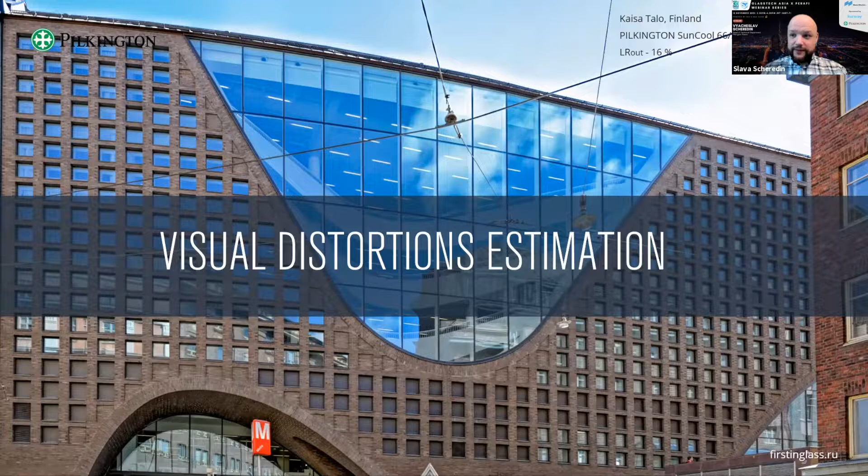But when it comes to reality, and the building is ready-made and done, there are a lot of distortions which you can see in many cases. Of course, most of them because of physics. Physics cannot be avoided, you know, we're living in the physical world. And today we will be talking about how to estimate the correct IG unit composition to minimize these distortions.

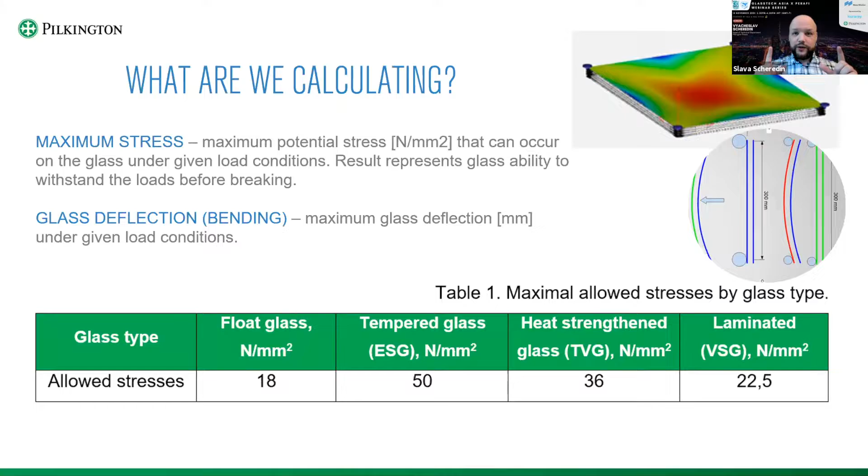First of all, usually for any big building, the calculation of the IG unit is made in terms of its performance, of course, and in terms of its behavior on the facade. The static calculation usually gives you two results. First one is maximum stress on the glass, which means if the glass will be broken under the loads or not. So under the wind, under the temperature. And the second thing is glass bending. So those two parameters you get from usual calculations. But the very important thing is how to correctly see and interpret the results of the calculation.

We take into account several load factors. Wind load, of course, because if you're building a tall building, the wind will be very high. Second one, and very important, are the climate loads, because the IG unit inside has some air or argon, meaning gas. And it is hermetically sealed on the perimeter. So when the IG unit is installed, when it gets heated up, the gas expands and the glass bends, creating distortions on the facade, which many don't really like.

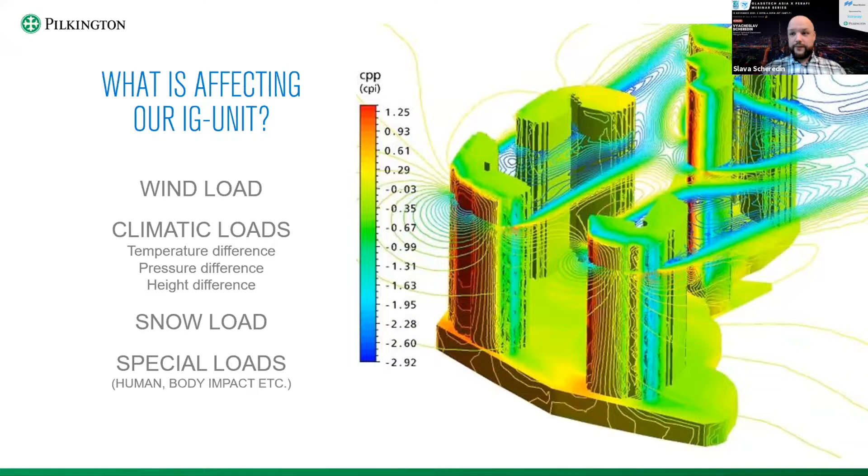Of course, apart from these two most important ones, wind and climate, we take into account snow and other special loads. Snow load is the case for Russia, but not Southeast Asia, except for mountains here.

Okay, jokes aside. Glass is calculated under extreme load conditions, meaning the wind which can happen once per 50 years, so twice a century. This is very important because the most important function of the facade is to withstand the maximum load combination and not break. Nobody likes when facade pieces are falling on people's heads.

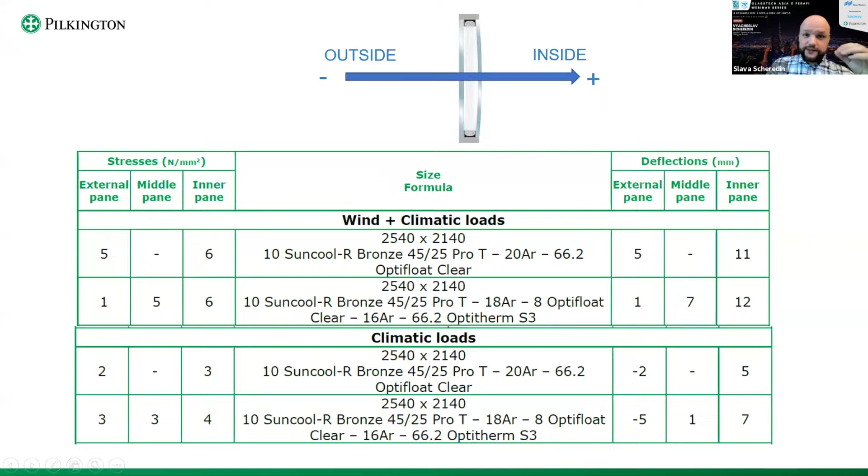But if we want to bring it closer to reality, meaning visual, what we see every day, nobody will look at the facade when a hurricane is raging. And the thing is that we look at the bending of the outer glass, because the outermost glass gives us the impression of the facade. And when we take maximum loads and usual loads, the results are extremely different. You can see it on the slide.

So here, this is glass deflection, and the external glass is deflecting in one way under peak loads and in a completely different way under the climate loads. So for comparison, there are two IG unit combinations which are calculated rather differently in this case.

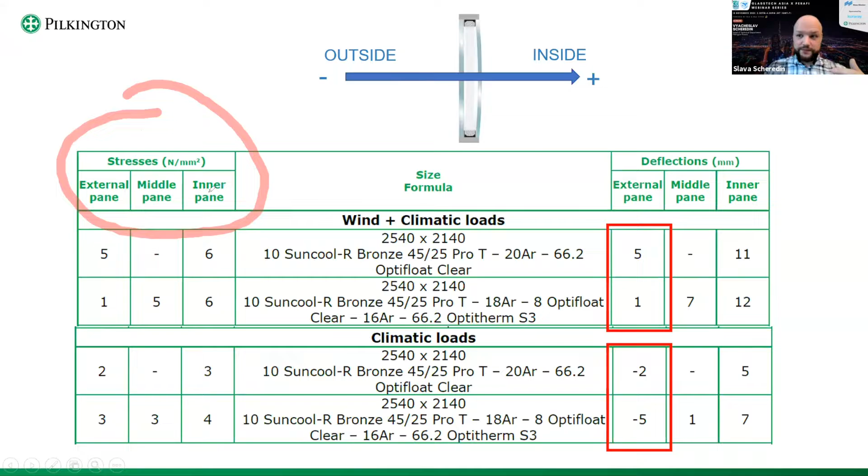And the goal today is to estimate how the glass will look in real life, not under peak loads. So to sum up the first part, regular calculations are done under maximum loads, under worst-case conditions, and they give you completely different results. To go back one slide, the most important thing in every peak load calculation is glass stress, meaning we are estimating glass breakage. And the glass breakage and the conditions under which glass breakage happens are not valid for our estimation.

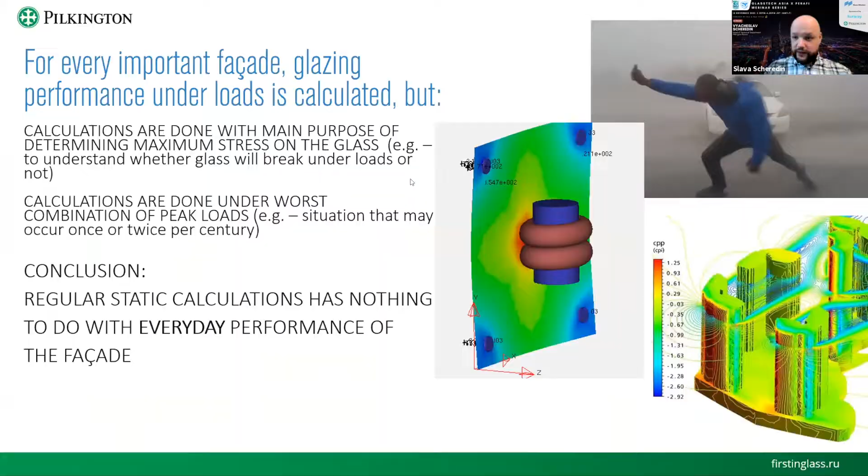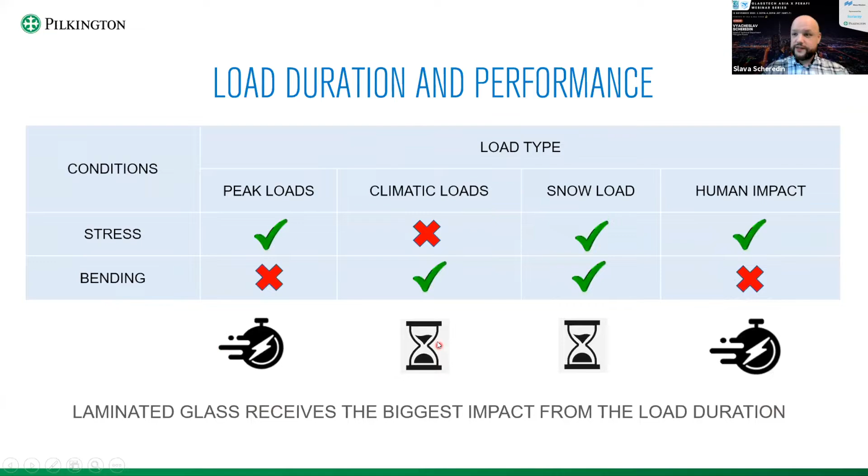And in order to understand what we do, let's see which kinds of loads can be applied. Peak loads, so maximum wind, usually have very short duration. Special loads like human impact also have very short duration. So in normal life, we don't expect very big wind bursts. And here comes the climatic part and the snow part. But the snow part, again, is for those countries that are very snowy. Out of that, we can gather that climatic loads are the most important thing for us. And under these loads, the visual performance of the facade should be estimated. So these loads are long-term, and we are good with that.

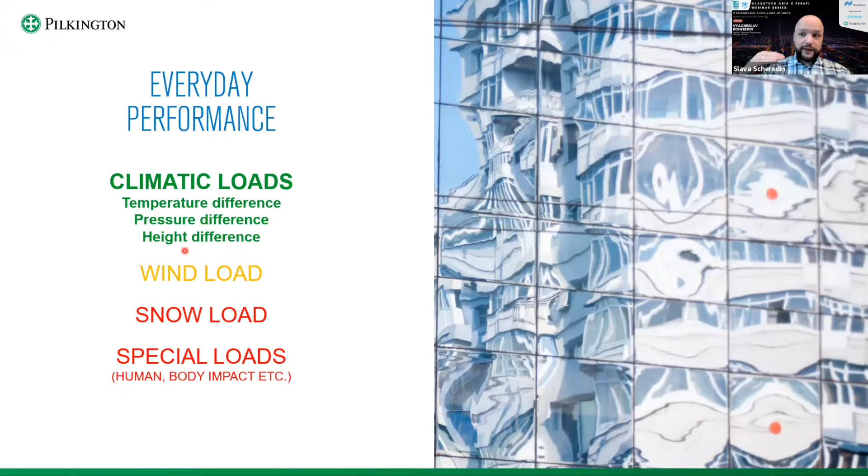So should we throw away the wind here? In fact, no, because strong wind is not regularly present, but we should take the wind which is happening every day under everyday conditions. And there we can go to the calculation process. The climate loads are most important, as we understood before. But what is the climate in terms of an IG unit? For an IG unit, the temperature inside the IG unit does matter, the temperature of the gas between the glass. By the way, if you install single laminated glazing without gas, it is mostly unaffected by climatic loads, which is good for lamination, but very bad for energy efficiency of the building in terms of solar control and U value.

In order to understand how to calculate the temperature inside the IG unit, we need to calculate its parameters, taking into account the climate, including temperature inside the building and temperature of the outside air. We need to take into account solar radiation, sky temperature, and average wind speed, meaning if the glass is overheated, the wind is good for you because it takes away the heat faster. Combining all of these, we can calculate the temperature of the gas inside the IG unit. Of course, the more solar absorption it has, the higher the temperature and the bigger the deflection will be. Also, it goes for the spacer: the wider the spacer, the more gas is inside, and the more gas, the more gas expansion.

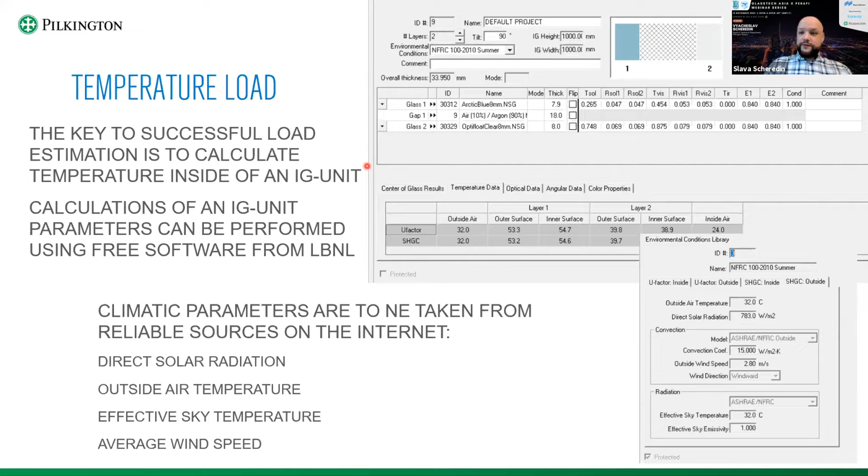So we estimated the temperature. Now it's time for us to estimate the rest. First one is the pressure, meaning atmospheric pressure. This mostly matters for high-rise buildings, skyscrapers. But it's also very important to take into account if your building is located quite far away, and most importantly at a different sea level than your production. So the difference between building and production does matter. In some cases, if you are producing your IG units at sea level and then transporting them high up into the mountains, you can install special valves to dump the pressure out. But these are nuances, though they can also be considered in the calculation.

So temperature, pressure, and height difference, plus the wind. For wind, we can use normal climatic data from the internet, from weather websites, to see average wind conditions. Usually the conditions are presented as wind speed, but wind speed can quickly be transformed to pressure using a simple equation. And mind you, we're not taking the peak maximum wind speed.

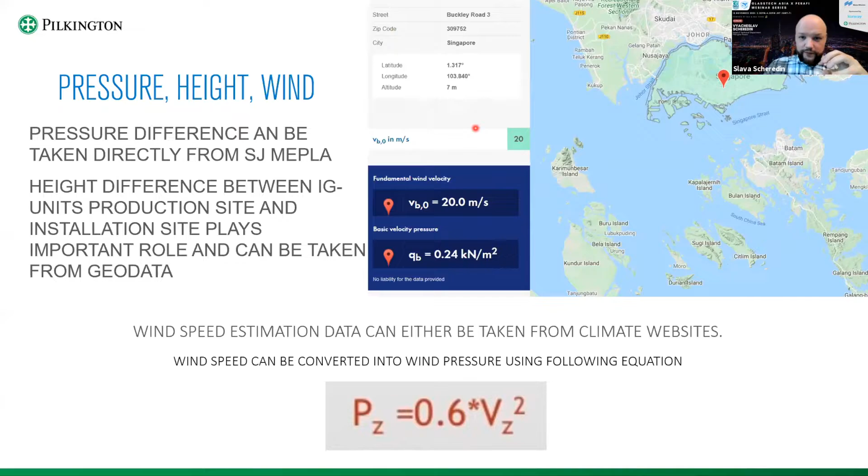We are taking regular wind speed, which is happening every day. Our goal, again, is to calculate the everyday situation. Combine all of this and go to the results. So I will sum up all of the points which I've made.

So deflection of the outside glass is the key. All of the glass is deflecting, but for us, the outside glass is very important. Furthermore, if you're using high performance glass with coating, it's usually a little bit more reflective than the normal one, giving you another reason to look specifically at the outer glass.

Now, the really important part: we combined all of the things together and got the results. Glass deflection, how to evaluate it? The size of IG units can vary wildly. You can have 1 meter by 1 meter, and you can have 3 meters by 6 meters, for example. The deflections will be different. So the key here is to evaluate the millimeters of bending per 1 meter of the shortest side of the glass of an IG unit. And in this way, you can compare a big IG unit to a small one.

From our experience, 2 millimeters per meter of bending under normal conditions is usually considered acceptable. And of course, the main thing which is affecting it is the thickness of the outer glass. That is the thing which is usually not considered on the American market, surprisingly for me, because those guys like thinner glass, and it can bend like a sail, but from the outside, it will not be looking good.

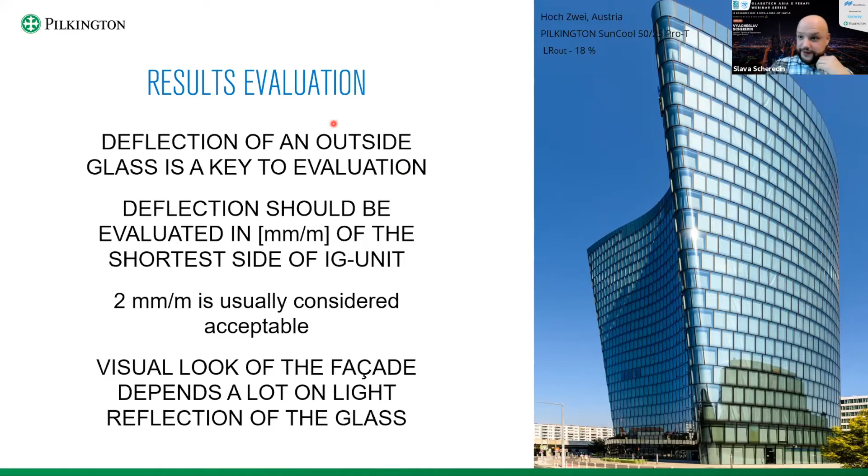Now, in Russia, we have been performing these calculations for a long time already. And usually we provide the customer with both of them.

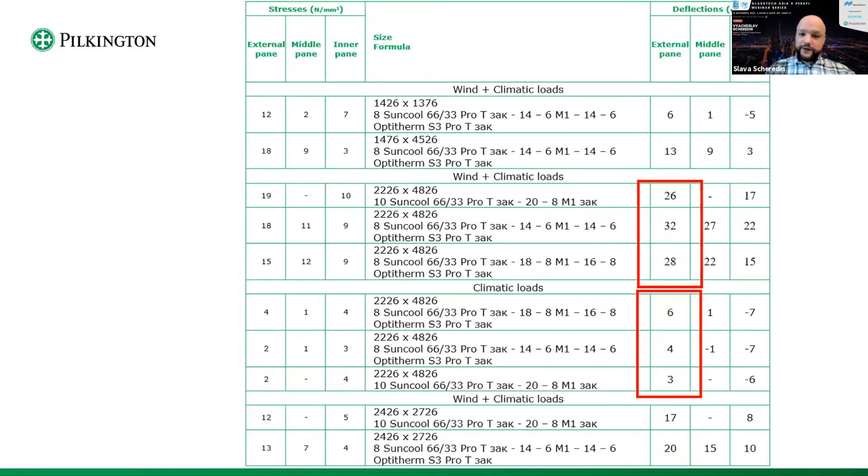Oh, okay, if you have a climate difference, because I once looked at the climate of Singapore and the temperature for the whole year was like this, straight. A little bit of envy from my side, but okay. So back to the point.

Different facade parts should be evaluated separately, and the IG units for different building parts should be designed separately. So the composition could be different for a non-transparent part of the building, even if the size is the same. So basically, this is it from my side. The point of today's topic was: please be smart in your approach to the building, because visually on the architect's render it always looks beautiful. But when you come to the details and the realization of your building, there could be some problems. And it is far better to use the expertise and to estimate the bending and the distortions well in advance to get the correct IG unit composition for you.

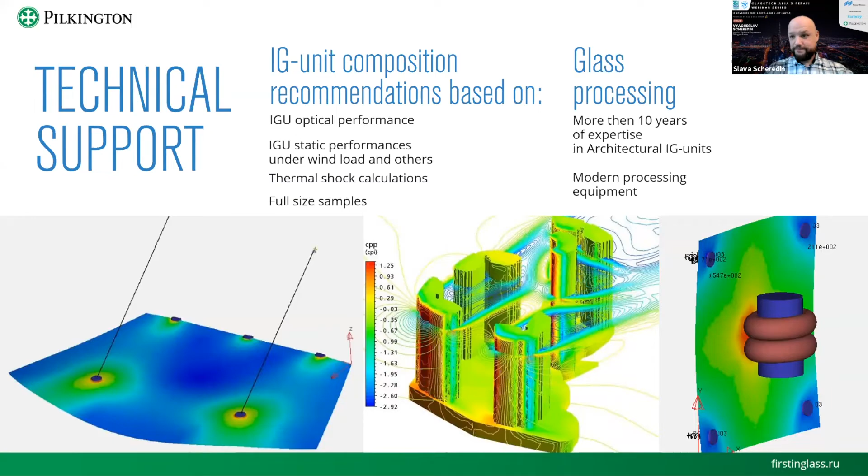So is it really necessary for a climate like Southeast Asia to use DG glass for the facade? It depends. Thanks for the question. Right, it depends, but mostly I would say yes. Everybody knows what is happening with gas prices, oil prices and electricity right now. Heating, and for Southeast Asia cooling, of the building consumes a lot of energy. Of course, if you're building a residential building, people pay for themselves, but if the building is commercial and has a centralized cooling system, then IG units can provide you incredible savings, not only in the price of cooling itself, but also the installed power of the cooling system could be much reduced, and so the price of the cooling system.

So if anybody is building a building for themselves, yes, he's investing something into IG units instead of simple laminated or tempered glass. But he can gain it back from the drop in equipment price, and for sure from the reduction of costs. That's not the point of today's presentation, but it also can be digitally estimated. How much can he save? What is the payback period? Returns, yes, thank you. What is the return period? It can all be estimated in advance, and you are free to address us and compare. So the answer to the question, in my opinion, is yes. Not because we are the producers of coated glass, but because of the reasons I explained. Yes, I totally agree with you. Having a high performance double glazed unit will help us achieve a more energy efficient building.